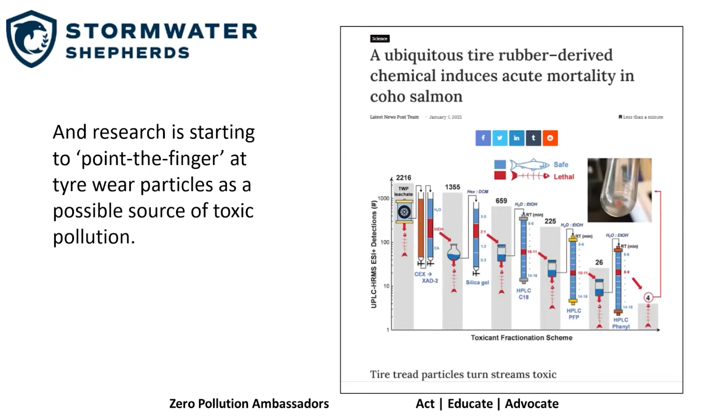I got in touch with the Environment Agency when this information was published, and was quite widely reported around America and the UK, and said to the Environment Agency, look, we must panic. And they said, oh, it's all right, it only kills American fish. So they didn't panic, and I was panicking. Subsequently, it has been proven to affect other species of fish. So we know that tire wear particles are a problem. We're just not entirely sure how big of a problem, but we know it's quite big.

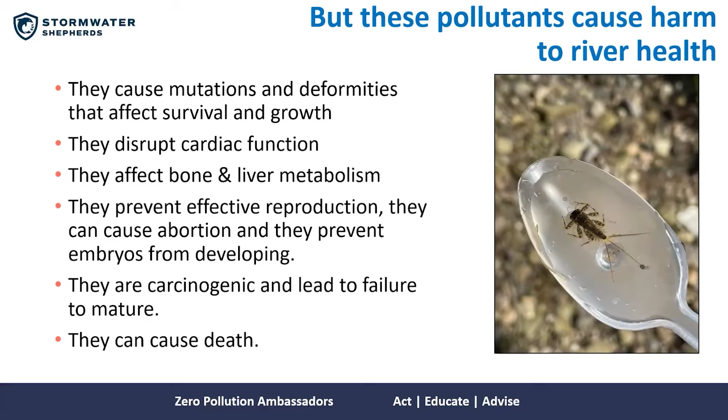We count them and we can see reductions in population diversity downstream of highway runoff, but nobody's actually looking at them to see if they're smaller or deformed or have a higher parasitic load. So this massive problem, and it frankly is a massive problem, is completely overlooked because nobody's measuring it. And nobody wants to measure it, because if they quantify it and reveal the magnitude of the problem, somebody will have to pay for the solution.

But it's bigger than that, because those insects that live in our rivers, a huge proportion of them are river flies. And those river flies hatch, and I've no doubt most of you have seen this, particularly in the chalk streams, and they create a food source for birds and bats and other creatures. So if we're decimating our population of river flies, that's having a huge knock-on effect to the wider ecosystem.

And also there's a bioaccumulation of some of the toxins. So the insects have metals in them, and the fish eat the insects, and the dippers eat the insects, the kingfishers eat the fish. So some of the pollutants go up the food chain and bioaccumulate.

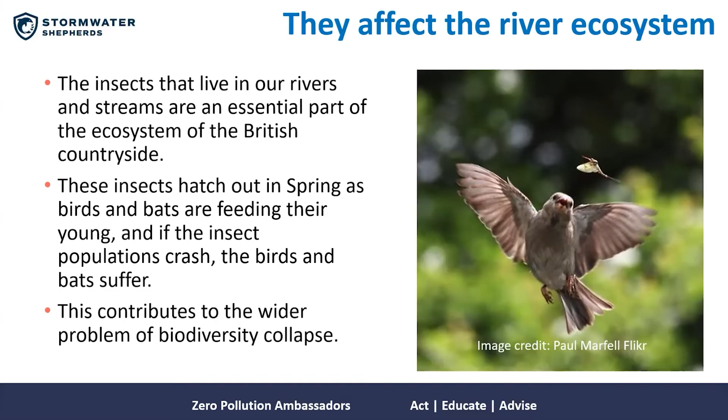Now, I have to make a declaration. I'm not a hydrogeologist. I'm sure there are people in the room who know more about chalk than I do, but I do know a bit about groundwater protection. There is research that National Highways are very fond of. One piece of research that says that if you put highway runoff into the ground, and one of those samples they took was chalk, it's fine, because all the pollutants are captured in the top few centimetres of soil, and they're all biodegraded, and the metals are captured and they assimilate. You can do it forever and it's fine.

My stomach tells me that's not true. My 28 years of environment protection mean a little alarm bell is going off in my head going, that's not true. The research was flawed. It's one piece of research. And I would dearly, dearly love for somebody else to do more work on that. What I think happens is that people measure the pollutants in the top layer and find all the pollutants, and they go, look, all the pollutants are here.

And then they measure further down in the substrate and they go, it's fine, there's no pollutants here. What nobody is measuring is the movement of those pollutants through the substrate when it's raining. So if the pollutants are to some extent getting captured at the surface, but some of them are going straight through the substrate into the underlying groundwater, then we've got a problem, and nobody's measuring that problem.

And I quite like this image of the famous white cliffs, because the other thing to remember is on a lot of the chalk, and indeed on the limestone up in Cumbria, there's very little soil. So it's all very well saying it's all right because the top 10 centimetres of soil will deal with all the pollution like magic. But if you haven't got 10 centimetres of soil, your magic is lost and you don't get that pollution prevention. So I think if anybody in the room wants to do more research on this, I'd love you forever, because I think this needs more research.

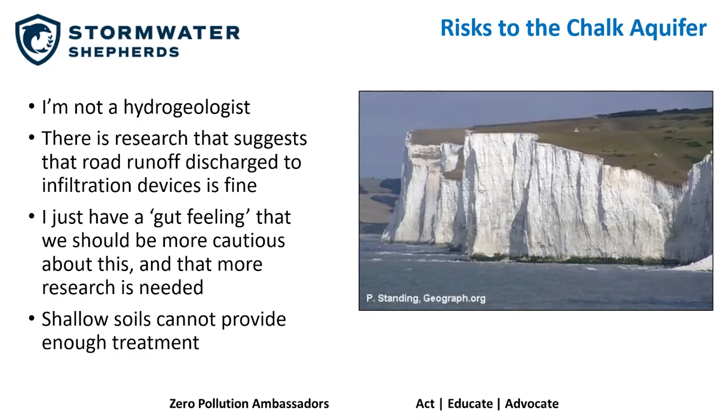and zinc. And so that discharge to ground with an exceedance of the environmental quality standard for polyaromatic hydrocarbons, as far as I know, and I know a bit, is illegal. In strict liability terms of legislation, that's an illegal discharge. It's a groundwater discharge activity and it should be permitted. And it's not. And it's going on all across the country.

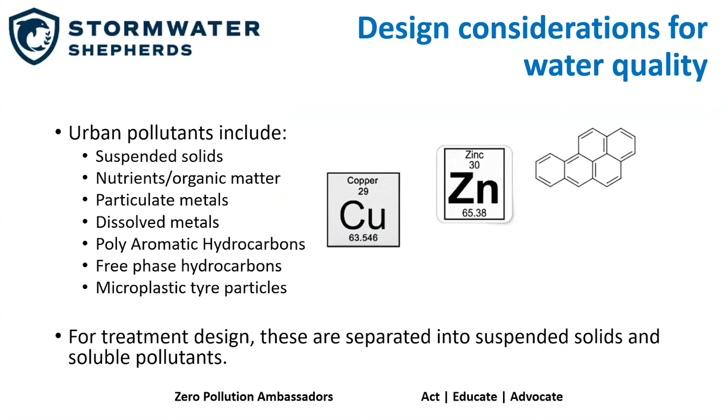So there are solutions, and they're not that difficult. Engineering wise and design wise, they're not that complicated. So we've talked about the pollutants that are in this road runoff. And what you need to remember for designing treatment is that we separate the two types of pollution. So we have the suspended solids and we have the dissolved pollutants, and they're two different entities when it comes to designing a treatment scheme.

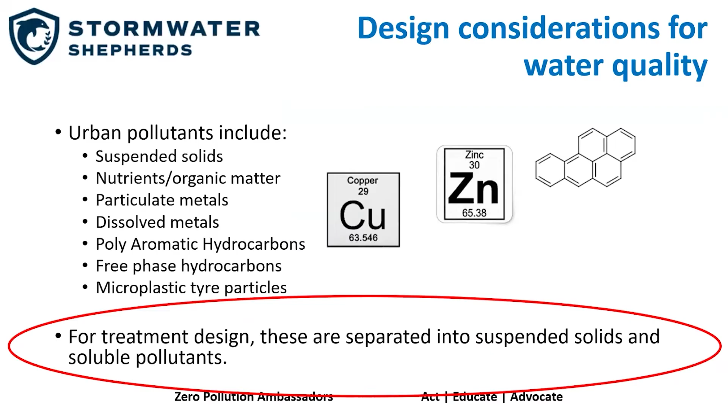Let the runoff rest and the sediment will do that for you. And that has in it most of the metals, most of the polyaromatic hydrocarbons, most of the microplastic tire particles, and most of the nutrients. So if you can get that out, you've done 80% of the work, and it's relatively easy. The dissolved pollutants aren't quite so easy.

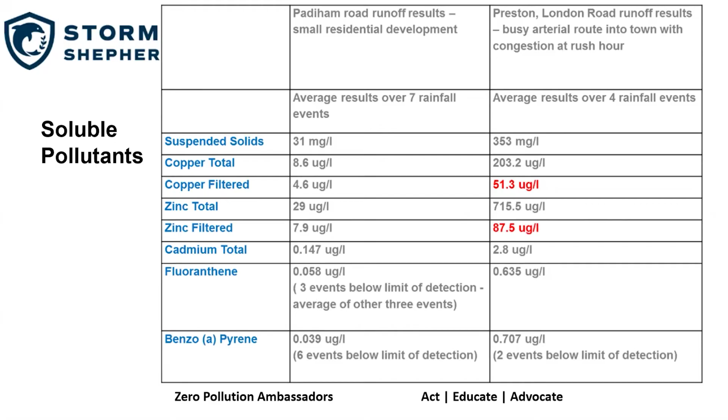What's important about this slide is it had already been raining for over an hour before we got there on both occasions. So when people say to you, well, we'll just treat the first 10 millimetres, or we'll just treat the first flush, or we'll just treat the first 15 minutes. No, they won't. Not for highway runoff. That works for a school playground. It works for a pedestrian area outside Marks and Spencer's where you'll quickly wash the pollution off when it rains. It doesn't work for motorways. It doesn't work for roads for two reasons.

One is that the drainage infrastructure on roads is very long and thin, so the pollution has to travel from the top of the hill to the bottom of the hill, and that can sometimes take 2 hours. But also, if you think about a school playground, when it's raining, nobody's causing any pollution because nobody's playing. But on a motorway or a road, when it's raining, the pollution is still there because everybody's still driving. And in fact, it's probably worse because it's washing the gunge off their cars. So remember, if you're ever talking to design engineers about treating pollution from highway runoff, don't let them tell you that they're going to treat the first flush because there is no such thing. It lasts for hours.

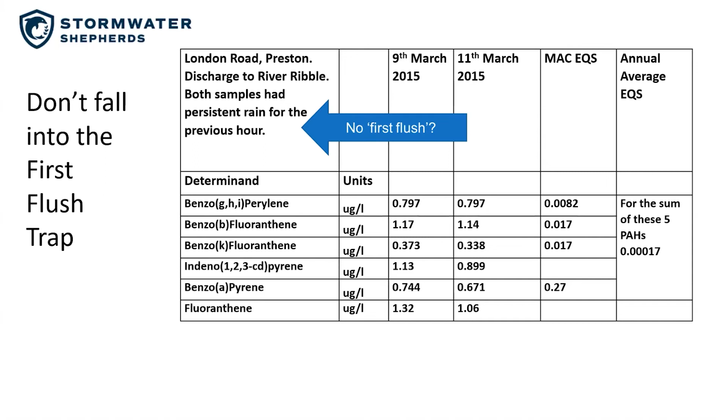So you've got birds and wildfowl and bats and all sorts of creatures. And if they're coming down to drink from that when it's raining or just after it's rained, that water will be poisonous. And I have a problem with that. Some of the other options are more engineering, and I suppose I would argue they're better because they isolate the pollution from the environment completely.

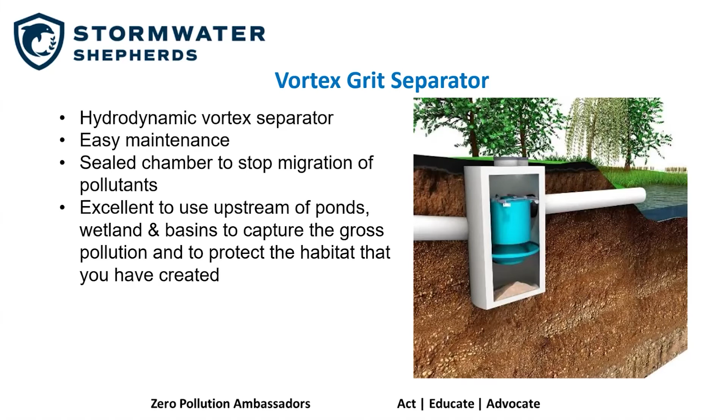The philosophy of these things is you've got 300 to 700 millimeters of stone, single-sized stone, at the side of the carriageway. The runoff comes off the side of that motorway and straight into that filter drain. And the sediment separates out in the gaps between the stones. And you can add a layer, I'll show you in a minute, you can add a layer that captures the dissolved metals.

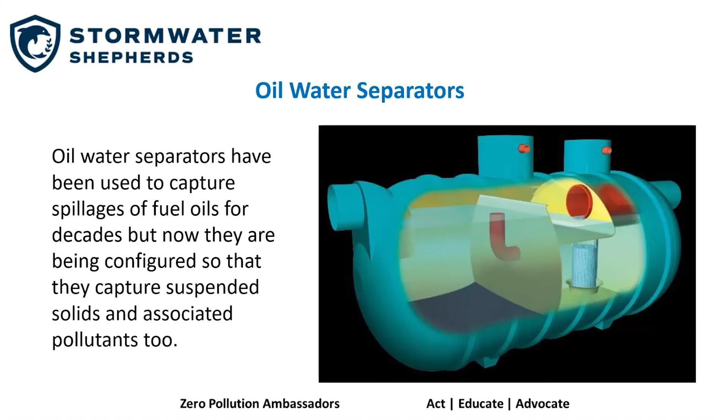The reason that is so fantastic is if you go back to this, that might have a treatment volume of, I don't know, 40 cubic meters, let's say, at the end of the pipe at the bottom of the hill. So remember 40 cubic meters. If you've got a kilometre of this on both sides of the carriageway, you've got 2,000 cubic meters of treatment capacity. So they are a fantastic option if you've got the right ground conditions and the right space and an engineer that will do it for you.

On the chalk, you'd have to line that and you'd have a perforated pipe in the bottom to take the water further forward, either straight into the river or into a pond. But it's still a fantastic option. And as I say, you can add a layer. This one says SDS Aqua-XChange, but there are 2 or 3 on the market now of treatment media that will capture the dissolved metals.

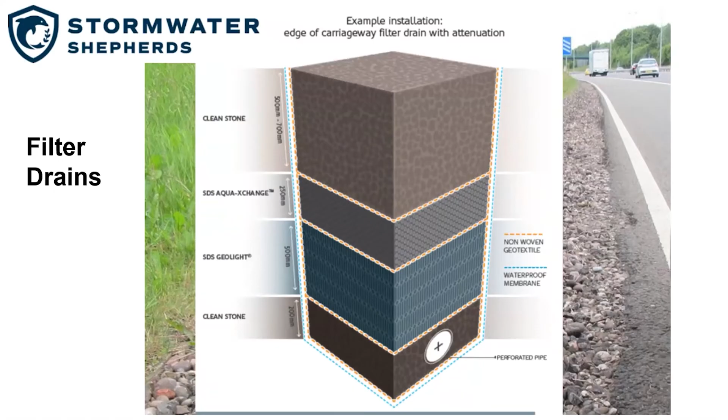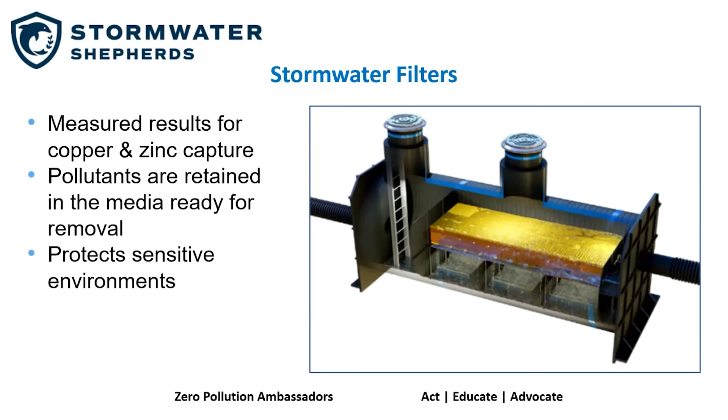So these are big. This is a downflow stormwater filter, and they've got that treatment media in bags in the middle of where the yellow thing is. They're brilliant, but they're flipping expensive and they're a pain to maintain. So only use these if you really need them. So if you're discharging your road runoff into a stream that's got pearl mussels in it, or if you're discharging your road runoff into a stream that's got white-clawed crayfish in it, then you might need one of these, but you really are only going to use them when you really need them.

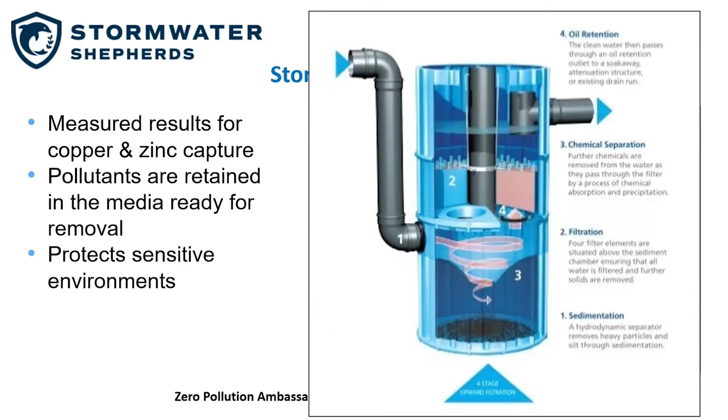That's an upflow filter. Same sort of philosophy, except the water in this one comes down at the left, spins around a bit to put some of the sediment in the bottom, and then it goes up through the filter, which is that pinky coloured cartridge. They're a pain to maintain as well. So only use them if you really, really need them.

If you've got that treatment media that I mentioned before, it looks a bit like cat litter, and frankly, it is very similar to cat litter. You can put it in the bottom of basins like this, and they've done one of these on the A30 or the A38. What they didn't know was it floats, so they put it all in the bottom of the basin, and then when it rained and the runoff ran into the basin, the media floated. So you have to put a layer of stone over the top, we discovered.

The other problem with the installation they did in Devon was, unknown to them, there was a local land drainage connection from a local farm, and the farmers spread some slurry and it filled with slurry, which didn't do it any good either. So there's some design considerations to bear in mind for this solution, but it's an option for infiltration. As you guys are on the chalk, then you're going to use infiltration devices, this is quite a good solution to catch that pollution before it reaches the chalk.

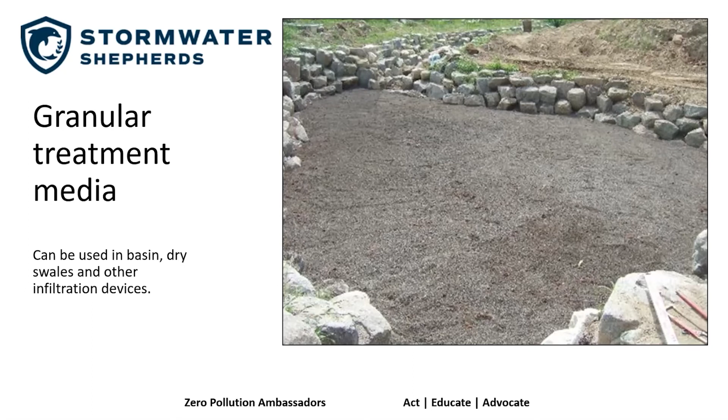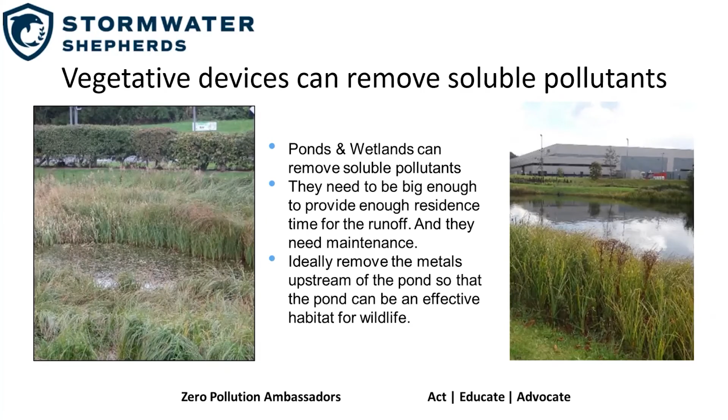And when you've done all that, then you can put it in a pond. But please remember to take out the gross pollution before you put it in the pond, because the pond will then do all those magic things that ponds do. So the sunshine will shine and the organic pollutants will break down, the microorganisms will eat the organic things, the plants will take up the nutrients, the metals will assimilate into the sediment at the base of the pond. All those magic processes will happen, but please do treatment first so that this can also be a habitat for wildlife, because these can be beautiful and they can be enormous. So let's get the design right.

And like I say, there are opportunities to combine that habitat creation with pollution control, but we've got to be really cautious. So all that was motorways, really, and trunk roads. The reason I focus on those is because National Highways have money and because they cause the most pollution. So I justify myself concentrating on those. But you will also be familiar, I hope, with sustainable drainage systems, SuDS. And SuDS are brilliant for all the other roads. So the road outside your house, the road that you go down on the way to school in the morning.